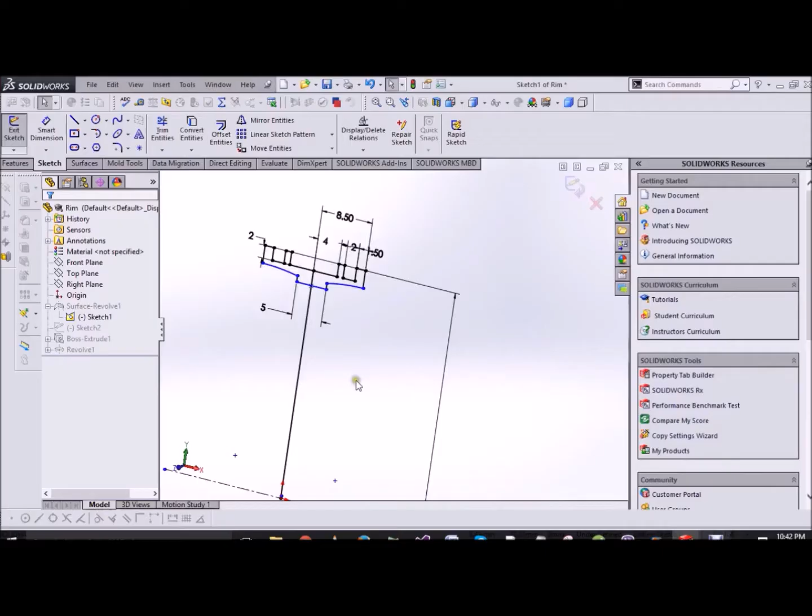At first, I didn't know where to start. I began looking at YouTube videos of how to make a bike in SolidWorks. A lot of them were about how to create the wheel. That's where I started. Although it seems really easy at first, I struggled with it. Using revolved base, it should have done the trick, but somehow it didn't work. I played around with it and then it finally came out as I wanted.

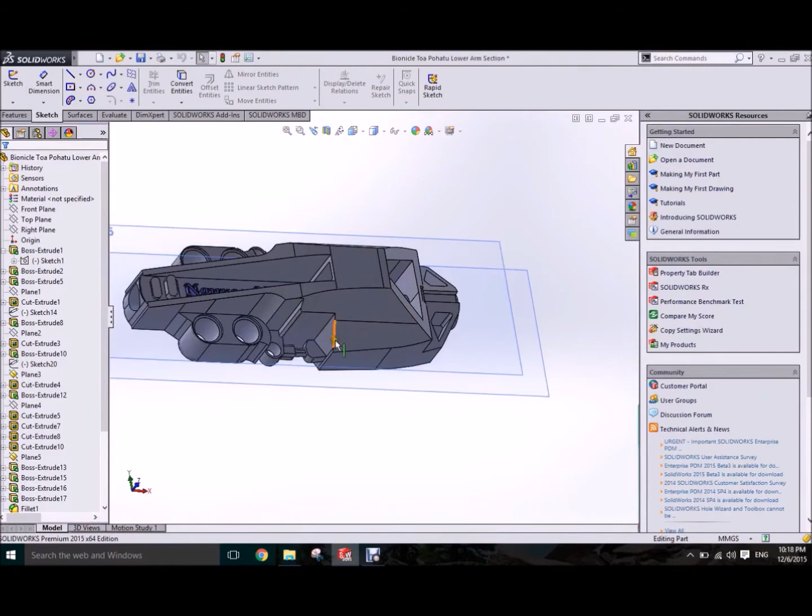The entire model is dimensioned in millimeter, but I used inch as my unit for the tire, so I had to scale it down to millimeter. I decided to create the most detailed part after the wheel because I wanted to spend more time on the most important part of the bike. I used sketch picture to import the picture that I have taken of the part to trace it so I can extrude and cut from the drawing.

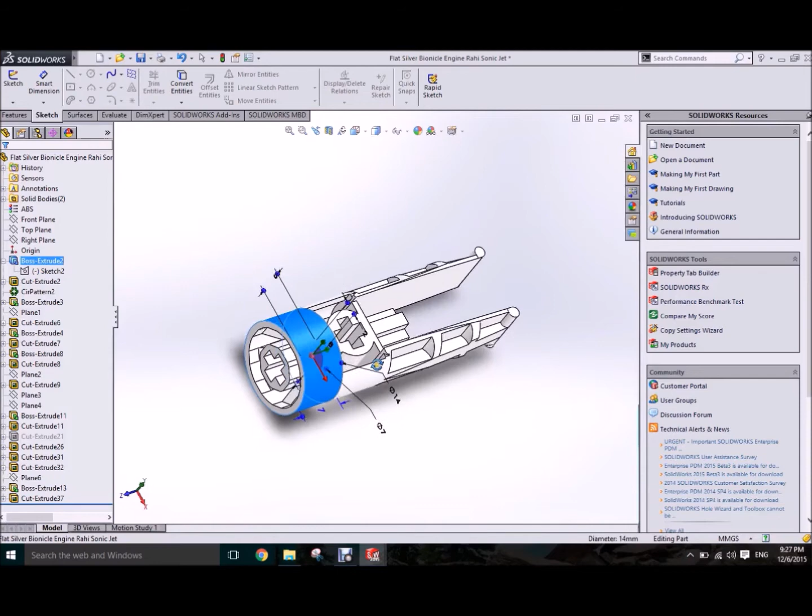I also had to create multiple planes because they have a lot of details. My part file crashed sometimes, but I always saved my sketch using Ctrl+S, so I didn't have to start from scratch. Sometimes I had to estimate the dimensions since the pictures were not perfectly normal to the sketch plane. The rest of the parts are fairly easy to make since they have many symmetries. Mirror entity and the linear pattern feature were very useful. In addition, using different configurations, I was able to easily create very similar parts.

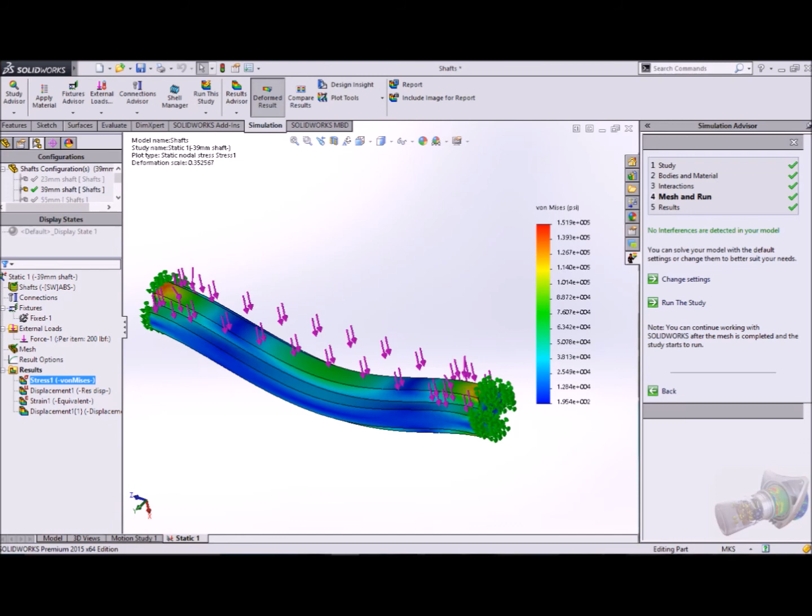For the simulation, I chose one of the configurations of the shaft. The material for the pieces is mostly plastic of type ABS. Since they are responsible for keeping the model together, I wanted to see how much force it can withstand. In the static simulation, I applied 200 pounds, which is more than a typical person's weight, onto the shaft. The maximum displacement is 0.01 meter and the maximum stress is 152,000 psi.